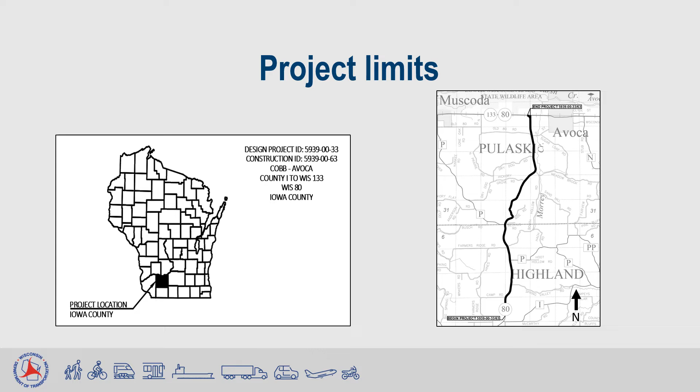The proposed project begins about a quarter mile north of the County I intersection and continues north on Wisconsin Highway 80 for approximately 8.82 miles to the Wisconsin Highway 133 intersection.

The purpose of this project is to address the existing pavement condition on Wisconsin Highway 80 as part of the department's strategy to increase the service life of the roadway, and to address the existing condition of a bridge on Wisconsin Highway 80, 500 feet north of the Dry Dog Road intersection.

The existing pavement on Wisconsin Highway 80 is experiencing longitudinal and transverse cracking in the wheel paths of vehicles and along the center line of the roadway. This results in decreased ride quality and increased maintenance expenditures.

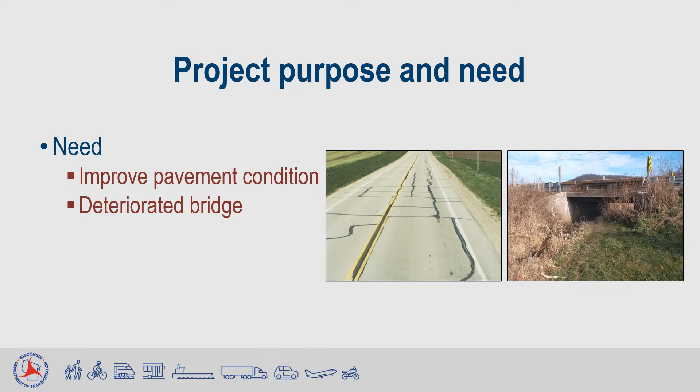The existing bridge 500 feet north of the Dry Dog Road intersection was built in 1930 and received an asphalt overlay in 2014. The bridge has met and exceeded its service life and requires replacement with a new bridge structure that meets the department's standards.

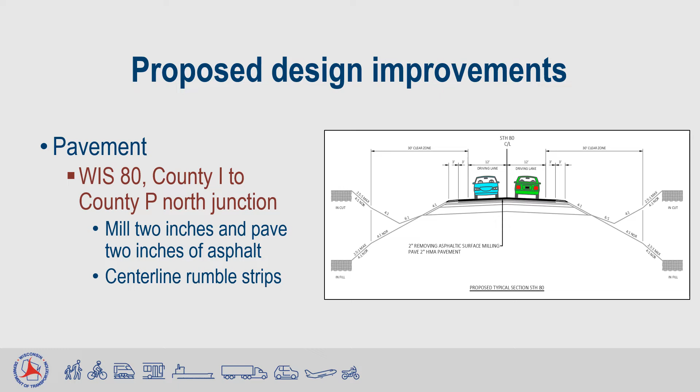The proposed pavement improvements on Wisconsin Highway 80 between County I and County P North Junction will consist of the following: mill 2 inches of the existing asphalt pavement and pave with 2 inches of hot mix asphalt, and install centerline rumble strips.

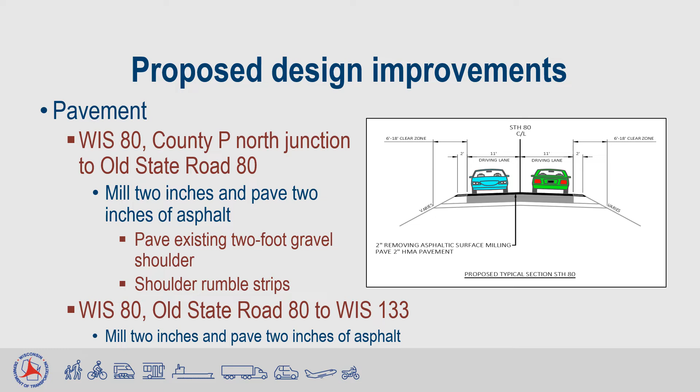The proposed pavement improvements on Wisconsin Highway 80 between County P North Junction and Wisconsin Highway 133 will consist of the following: mill 2 inches of the existing asphaltic pavement and pave with 2 inches of hot mix asphalt. The existing gravel shoulder will be paved and shoulder rumble strips will be added between County P North Junction and Old State Road 80.

The proposed pavement improvements on Wisconsin Highway 80, 500 feet north of the Dry Dog Road intersection, will consist of the following: excavate and reconstruct Wisconsin Highway 80 approaches to the bridge. This reconstruction will consist of 5 inches of hot mix asphalt, over 10 inches of aggregate, over 16 inches of crushed material.

The proposed bridge structure improvements on Wisconsin Highway 80, 500 feet north of the Dry Dog Road intersection, will consist of the following: remove existing bridge structure B25-176 and replace it with a single span slab concrete bridge, B25-194. This bridge will be approximately 41 feet long and 28 feet wide between the guardrail.

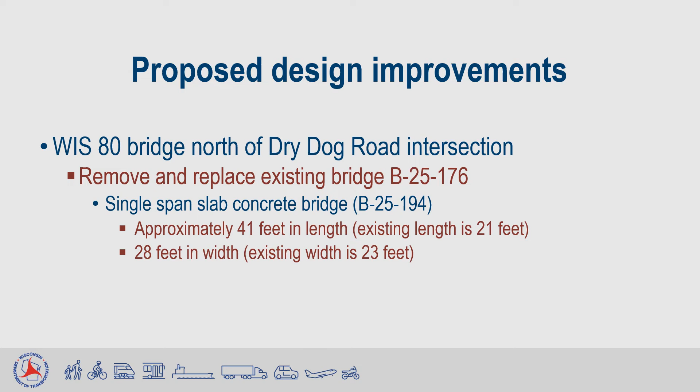Improvements on Wisconsin Highway 80, 500 feet north of the Dry Dog Road intersection, will have real estate impacts. Preliminary real estate impacts include the following: 2 properties are directly affected.

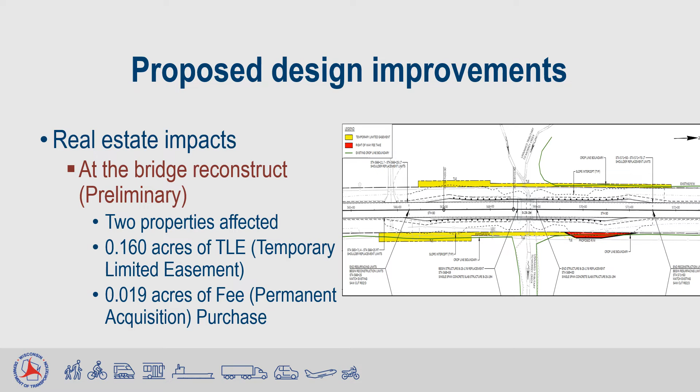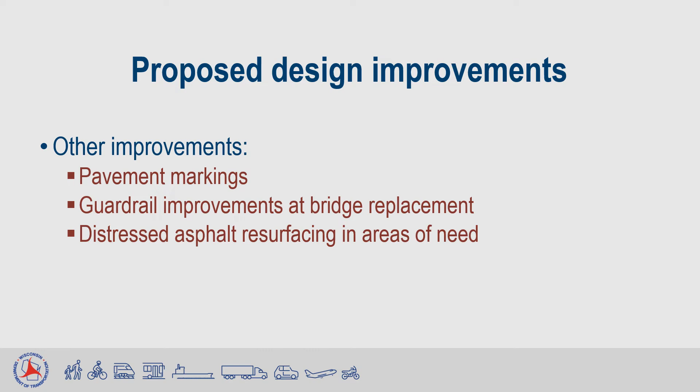Other improvements along the Wisconsin Highway 80 roadway include new pavement markings, new guardrail at the bridge replacement section, and distressed milling and paving in areas of need along the travel lanes. This would require milling deeper and paving thicker asphalt as a repair.

Wisconsin Highway 80 is proposed to be closed to through traffic during construction from County I to Wisconsin Highway 133. Access will be available for local traffic and emergency responders to reach residences, businesses, and properties. Through traffic will be shifted to a detour route using US Highway 18, Wisconsin Highway 61, and Wisconsin Highway 133.

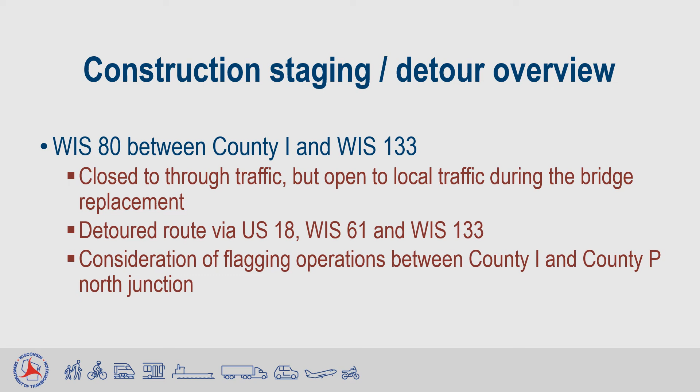A flagging operation between County I and County P North Junction is under consideration for local traffic during construction operations, and for all traffic before the bridge construction starts and after it is completed.

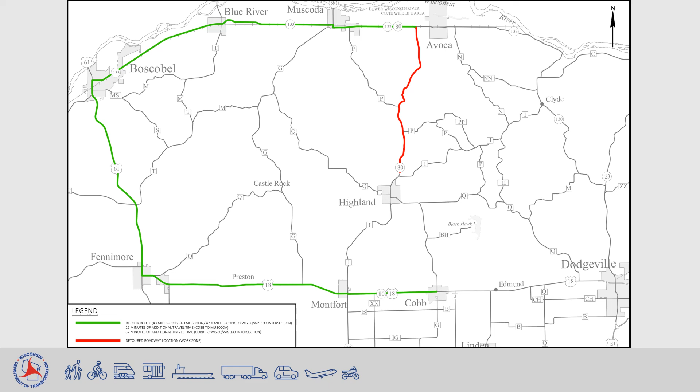This slide shows the construction work zone in red and the proposed detour route in green. The detour route is anticipated to add additional travel time for through traffic as follows: 25 minutes of additional travel time between Cobb and Muscoda, and 37 minutes of additional travel time between Cobb and the Wisconsin Highway 133 intersection.

Work on the environmental document has started and is anticipated to be signed in December 2022. The plat is anticipated to be recorded in March of 2023, with real estate acquisition to be completed by spring of 2024. The plans for the project are currently scheduled to be finalized in May of 2024.

Construction is anticipated to begin in the spring or summer of 2028, though it could be advanced as early as spring or summer of 2025 if funding is available.